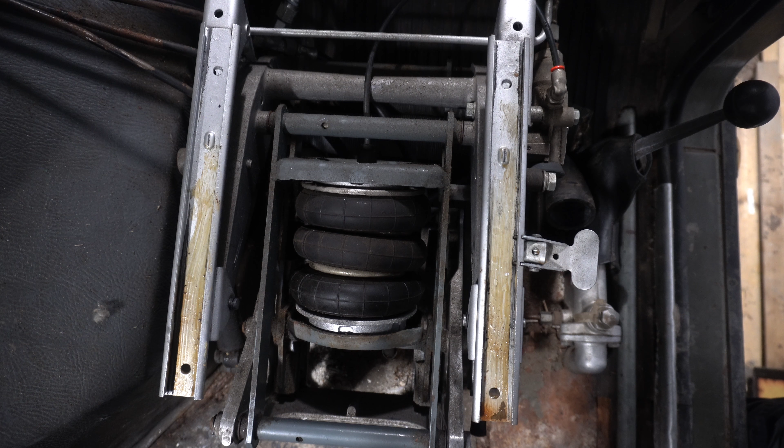Welcome into this video. In this video we'll be figuring out how we will mount the new chairs to the original air suspension. So this is the original air suspension. The new seats, they came with their own rails to go forward and backward. And these are from the original seats, but these are welded to the frame.

So what I want to do is reutilize the hole that's here, there, in the corner there, and in the corner here, to use a mounting plate that will match with the holes of the new seats, because these holes, they don't match up with the new chair. But I want to utilize the original air suspension so the seats will rise to the same height as they're doing right now.

So to create this plate, I will use Fusion 360 and I will send the design over to waterjet so they can cut out the metal and then we can mount it here and put the new chair on top. There's one thing that we need to do in order for this air suspension to work. It's only on the driver's side, but currently the cushion that's in the middle right here, it's loose. So I need to tighten that again.

So if you're sitting on the chair right now, as long as it has weight on it, it will lift up, but when the weight is going away, the air will just rush out. So that's one problem I need to fix on this chair. But the other one is in a good condition, except that on the other one, the rails that you see right here, they are mounted to the chair.

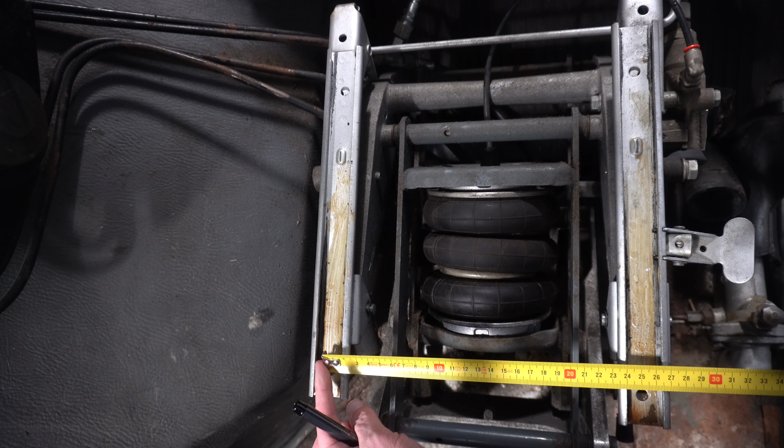This is 25. So this is 26.5, and these ones are 25, so they are a bit closer. And then they are 30 apart, and these ones are also 30 apart. So they are 30 lengthwise, and they are 26.5 and 25 widthwise. So I'll write that down on the template.

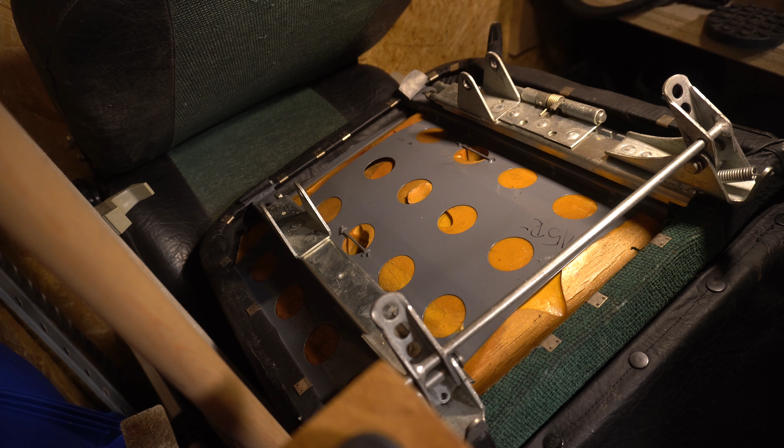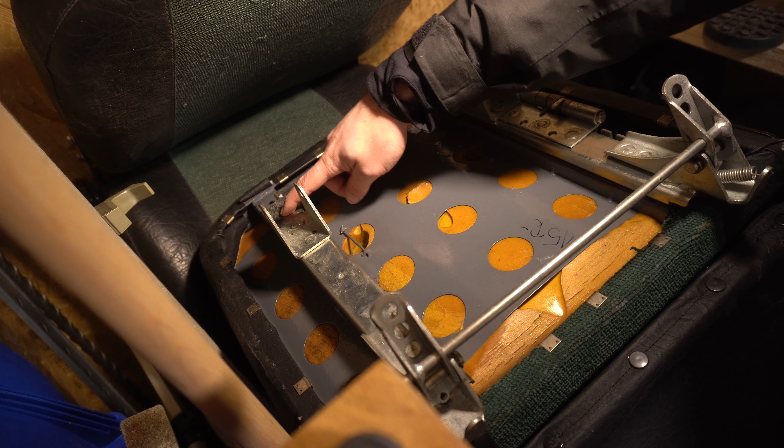We're now in the shed, and this is the chair that the rails are stuck on. As you can see, they are welded right here and here. There are a lot of weld spots. So what I will do is I actually will remove these rails from the seat, and I will drill out the holes right here and here, so they will be, I hope, the same distance.

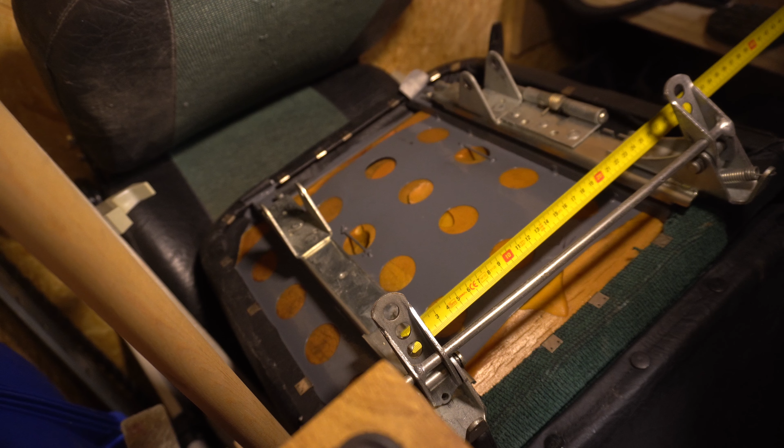We'll measure that right now. So between those 2 holes, it's 25 again, so that's very good. So we can use that one. And if we look over here, that's 26.5. So those are the same width. Now we'll look at the length. Should be around 30.

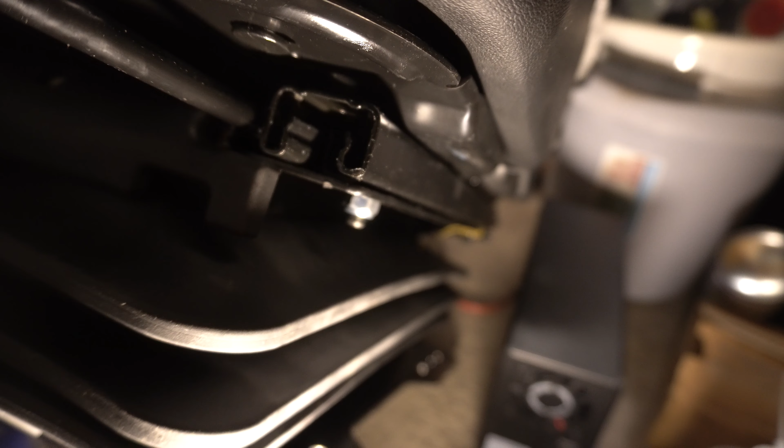Yeah, that is 30, so we can utilize the same mount. So this is the underside of the new seat. And as you can see, the new rails have a mounting system already. I measured it a bit and they are 33 centimeters apart, front and back. At the back they have 2 bolts, which you might be able to see right there, and there's 1 bolt right here in the front.

So I can make a plate that will be the 26.5 and 25, and then it will be 33 for the new chair, and then they will be able to mount. Okay, so I'm in Fusion 360. I use this software to design 3D models for the 3D printer or when I'm designing parts. In this project we'll create the plate that goes in between the old air suspension and the new seat.

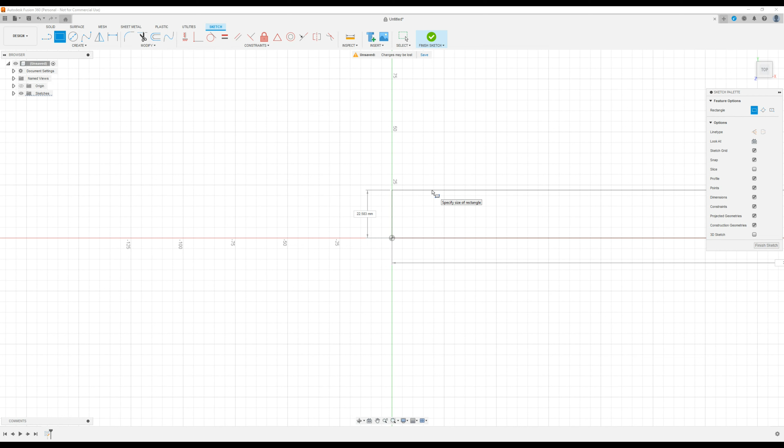Off camera I went back and took some extra measurements, so I know that the plate has to be 39 centimeters deep and 38 centimeters wide, and that the bolt holes need to be 8.5 millimeters. So we'll start off by creating a new sketch, and we press the top plane. Then I will select to create a rectangle, and I click the center point right here. Because the measurements in the software are in millimeters, I'll write 380 because it needs to be 38 centimeters wide. And then I write 390 because it needs to be 39 centimeters deep. Press enter, and when I zoom out, now we have a square.

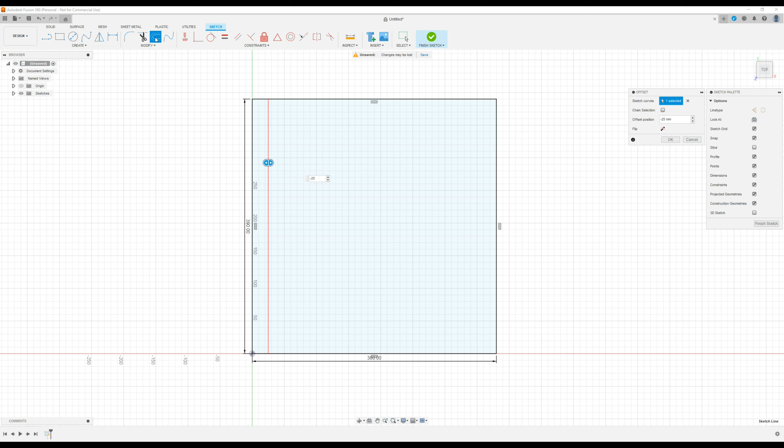So we can now add the holes for the new chair. Those holes were 33 centimeters apart, and as we know, this plate is 38 centimeters wide, so that's a 5 centimeter difference. We want the chair to be in the center of the plate, so we divide 5 centimeters by 2, and we are left with 2.5 centimeters. So I'll select the left edge, I'll say offset, and I'll write minus 25, because we're in millimeters, and I'll do the same on the other side. So now we have the 2 guidelines of where the middle of the hole for the bolts needs to be located. The new seats have 6 bolts, 2 in the back and 1 in the front.

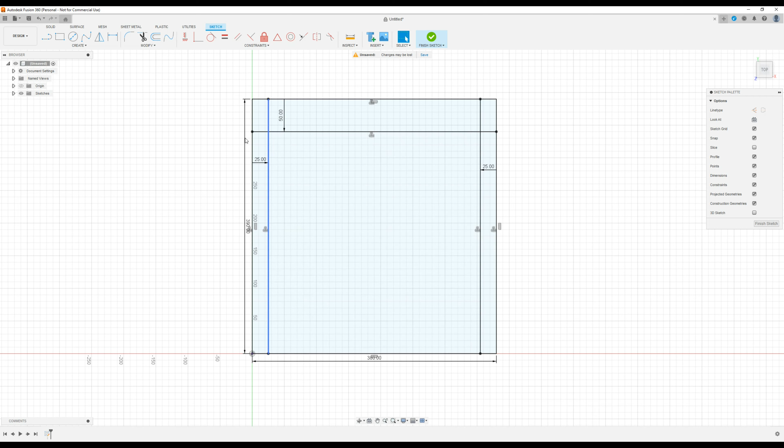From the back, the first hole is located 5 centimeters in, so I'll press the back line and write minus 50. And the other hole was 2.5 centimeters in front of this one, so I will press this line again and say minus 75. So now we know where the holes in the back are located, and we know that from this hole to the front it was 28 centimeters. We'll take our 7.5 plus our 28, and we're left with 32.5 centimeters from the back. So I'll select this back edge, say offset, and write minus 325.

This is Sven from the future. I actually calculated it wrong here. The holes need to be 3 centimeters more forward. In the calculator I accidentally typed 25 instead of 28, but I've already altered the design off camera. All right, I'll let you enjoy the video.

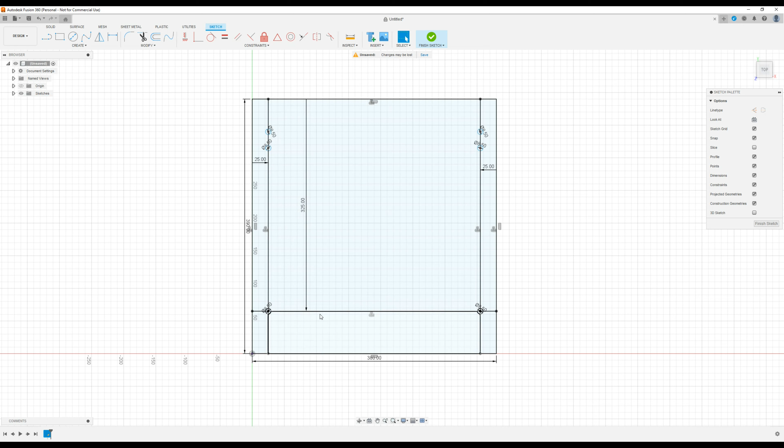So we'll take our circle tool and draw an 8.5 millimeter hole, and I'll do that also for the other 6. Like so. And now we have those 6 holes drawn on our canvas. I'll remove our guidelines because we don't need those anymore. And now we start drawing the holes for the old air suspension. Remember that at the back it was 26.5 centimeters and in the front it was 25 centimeters apart, and they were 30 centimeters apart depth-wise.

So we take our 39 centimeters and subtract 30 centimeters, and we're left with 9 centimeters, divided by 2, and then we're left with 4.5 centimeters from the back and 4.5 centimeters from the front.

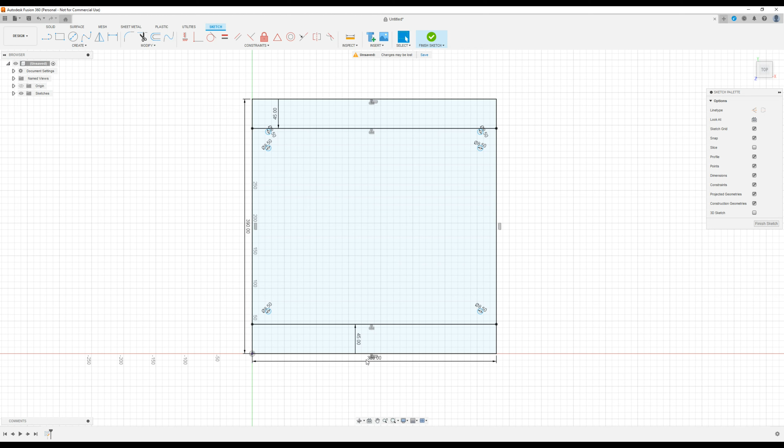So on that line, the holes in the back, and on this line, the holes in the front need to be located. The holes in the front were 25 centimeters. So we take 38 centimeters and we subtract 25. Then we're left with 13 centimeters divided by 2. And we're left with 6.5 centimeters from the left and 6.5 centimeters from the right.

And at the back, they were 26.5 centimeters apart. And if we inspect now, the ones in the middle are 25 centimeters apart, which is correct. And if I take the ones from the back, they are 26.5 centimeters apart, so that's perfect. So we draw the holes at the back.

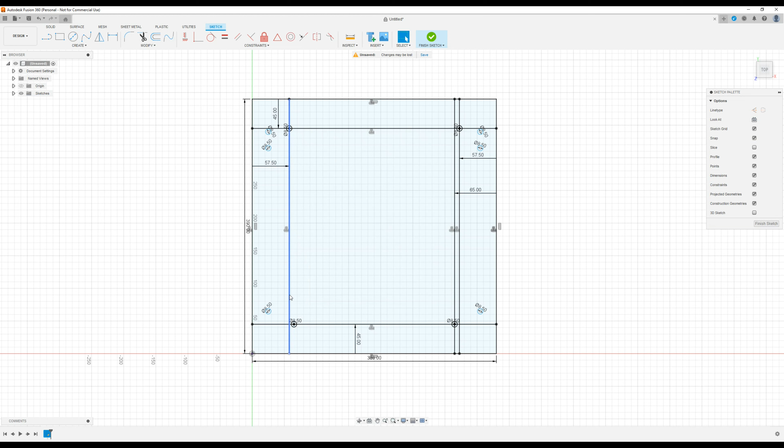So now we can remove these extra lines that we drew, because those were just guidelines. And now we're left with all the holes for the new seat and the old air suspension. One thing that I want to do is, because I don't like the wasted space here in the middle, because that's a lot of metal that probably isn't necessary.

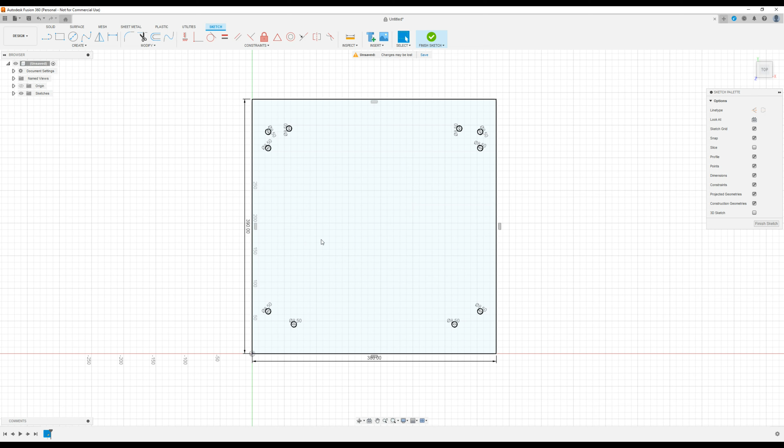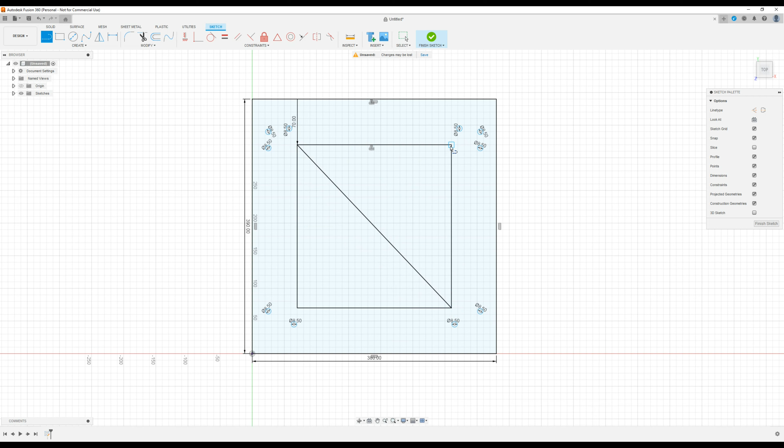So I'll press offset first this time instead of the line first. I'll click on the rectangle and I'll write minus, let's say, 70. So I'll do it like that. And then I'll get my line tool and I will draw a line from this corner to this corner, and from this corner to this corner.

And then I will press this line and I'll say offset and I'll write minus 10. I think actually 10 is a bit too narrow, so I will write 20. Then we can remove the middle lines because they are no longer needed. And what we're left with is an X pattern in our metal plate. This sketch is now finished, so I'll press finish sketch.

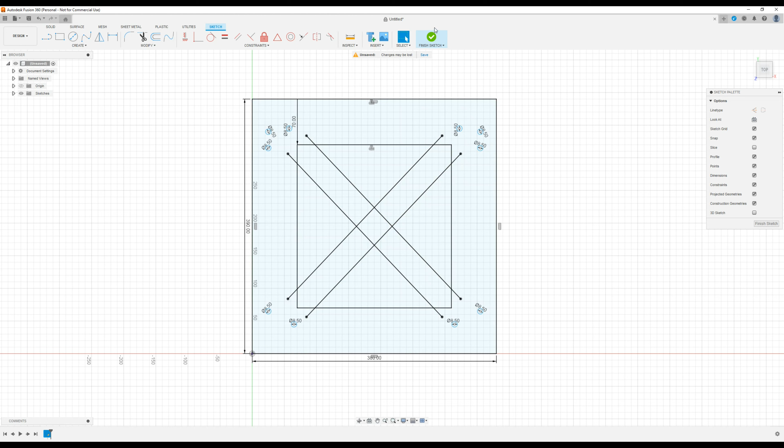And now we are in the 3D window again. But as you can see, it's now just a two-dimensional object. To make it a three-dimensional object, we'll press extrude right here. And I will press this plane right here. I'll press the X pattern that we have. And I want to make this out of 5mm steel, so I'll press 5 to extrude it 5mm.

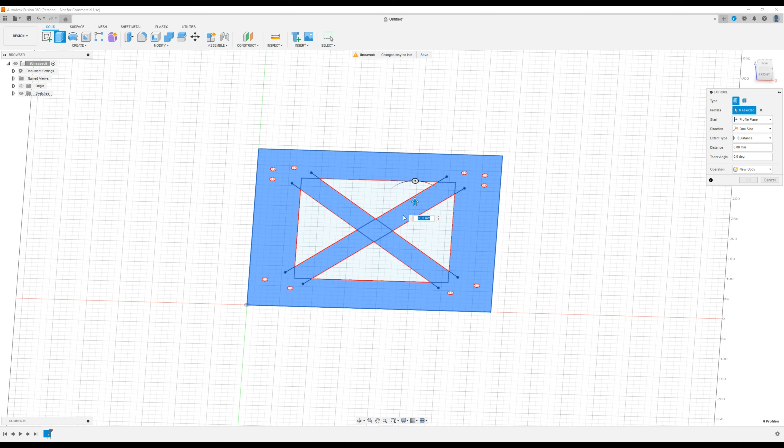And since I didn't select the holes or the center parts of the triangles, those were not extruded, so that's how we have now created our holes. And these triangles right here are material that we don't need. So it will make the plates a bit lighter, but it will still have the strength because of the X shape inside of it. So there's one last thing I want to do before I call this model finished.

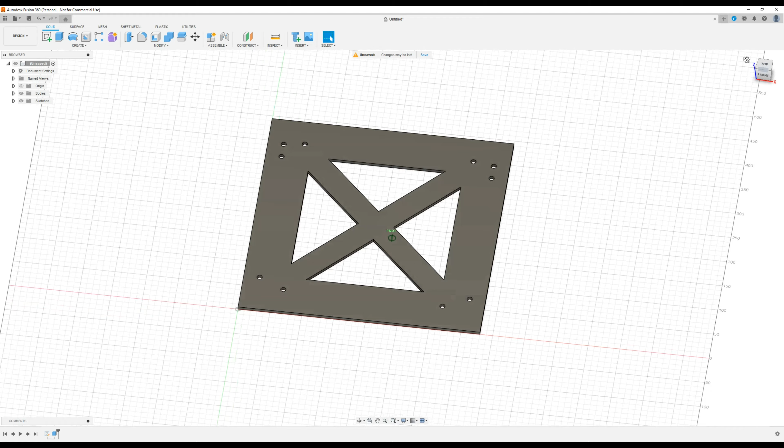Actually two last things. Imagine coming in and out of the truck and this point sticking out a bit and you hitting your leg or something against it. That's not a pleasant surprise. So what I will do is I'll make rounded corners. So I will select this corner.

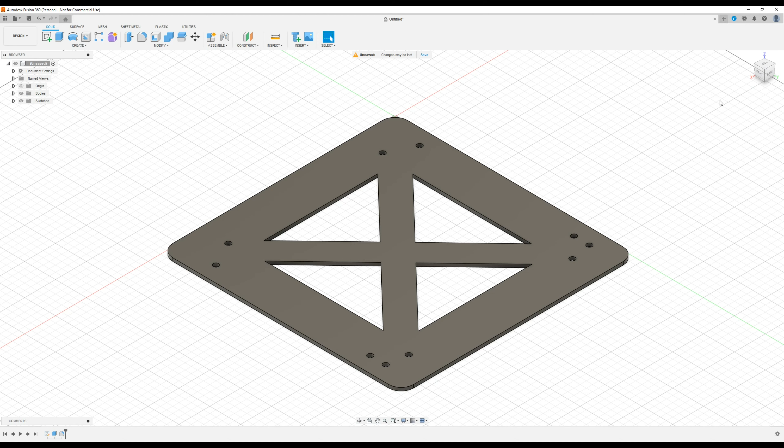I can use the fillet tool and I will say I want it to be rounded 20mm. And what that will do is give it rounded corners. And because it's going to a water jet cutter, it's very easy for the water jet to make curved edges. So that's perfect. Now I'll do the same for the inner part of the triangles.

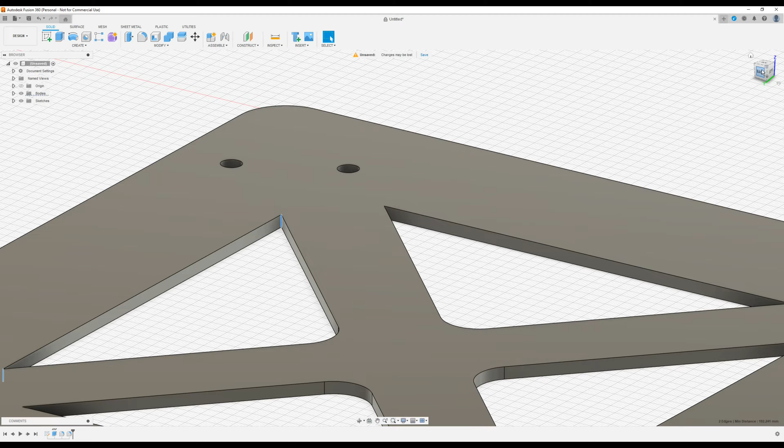And as you can see, that gives a nice little triangle shape to it, but with the rounded edges it's very, very clean. So yeah, this is the plate that will go in between the chairs.